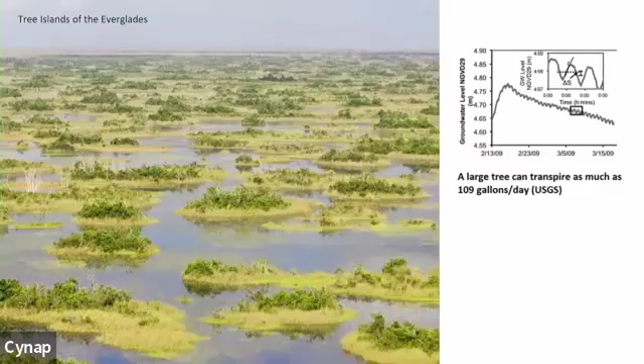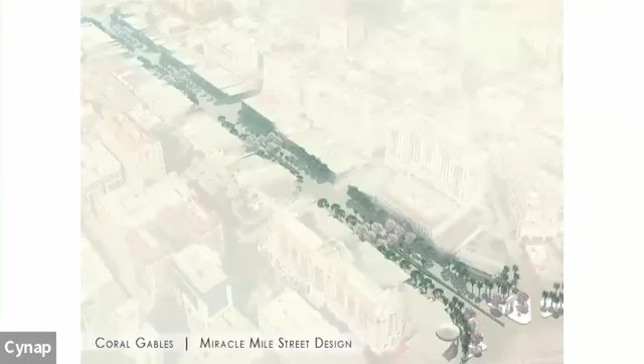The project I'm going to show next took Dr. Sinto's work, which studied a tree island in the Everglades. As a firm, we were commissioned by the city of Coral Gables to redesign Miracle Mile in 2016, right after this study came out. We also redesigned Giralda Plaza next to Miracle Mile. That project had $27 million for the mile and Giralda Plaza, a once-in-a-generation opportunity to solve pluvial flooding—rainwater flooding that would flood the shops during summer rains. It was a soggy district, with elevation around 7 or 8, which is high ground for Key Biscayne, but not that high.

Gracias, thank you. I think the double mic—audio's way better. I kept adjusting my hearing aid.

So the question was, how can a tree island in the Everglades inform the redesign of an entire district, an entire street? Step like a foot or two away so you won't be in that background. Okay, cool, thank you—and I don't have to show my back to the crowd.

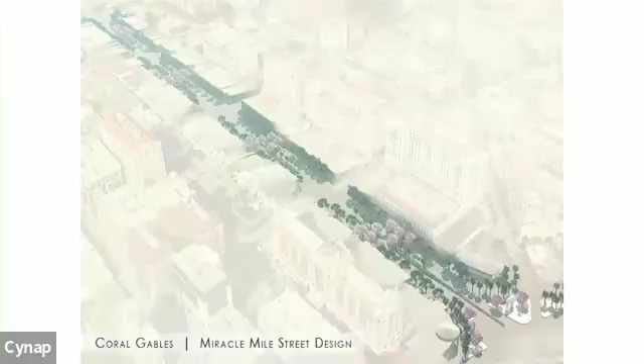Hurricane Irma tested this project one month after it opened. Irma flooded a lot of Southeast Florida and took weeks for towns to recover, but Miracle Mile stayed completely dry. The New York Times wrote about the project because of the number of business owners who were able to open the next day unscathed.

But the key is, how do you build a tree island that can evapotranspirate groundwater and desaturate soil? In low-lying places, you need to make room to store that water. In the middle of a place like Key Biscayne, you have a different groundwater scenario than at the edges. The edges have a salt wedge, while in the middle there's a phenomenon called the Ghyben-Herzberg phenomenon, a freshwater lens of rainwater floating on top of salt, since freshwater is more buoyant. So sometimes flooding might occur in the middle of Key Biscayne instead of just the edges—counterintuitive, but that's the bubble of fresh water.

In the case of Miracle Mile, we excavated fairly deep, almost to groundwater, and backfilled with structural soil. Structural soil is a fancy term developed by Cornell University to describe uniform gravel. Essentially, the base of a tree island and the base of Miracle Mile is a big stone reservoir, to put it simply. Structural soil is the same uniform gravel with a lot of void—40% void, which is the number you use for your stormwater calculation.

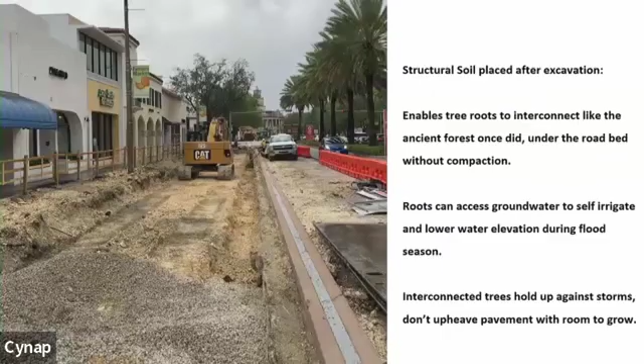It also has growing medium in it that encourages tree roots to grow underneath. So the structural soil protects tree roots from truck traffic, allowing it to handle the load, but it also lets tree roots connect to each other the way the forest did a thousand years ago, accessing groundwater to self-irrigate. If you plant a tree conventionally, it can't access groundwater, so you have to irrigate and add fertilizer. But city water is pH alkaline, which makes plants inefficient at uptaking fertilizer—it's a feedback loop. If plants can access groundwater, they're happier, more robust, more anchored in hurricanes, so you get less disaster response recovery budgets. They connect with each other, share nutrients, and connect to the groundwater—everyone's happy.

Now the challenge with Coral Gables is the big budget, $27 million. But if you're going to look at an entire city like Miami, we can't have that cost per square foot for domestic neighborhoods. So we have to look at other materials like porous paving—asphalt, concrete, or other systems—because we can't use the same stone with porous joints everywhere that we did in Miracle Mile.

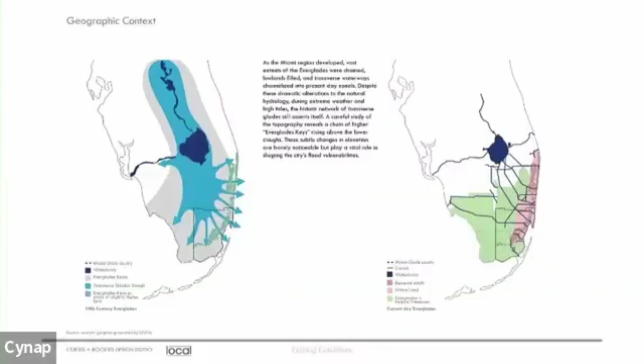So the city of Miami commissioned us after the Stormwater Master Plan study to look at green infrastructure systems at scale—not a single bioswale, but a whole network of systems that can take what we did in Miracle Mile, have the same performance, but scale it with a more affordable cost per square foot.

And in the case with this, a lot of the planning—this is the city of Miami—what we organize is not a watershed approach, but an ancient landscape approach. That is to understand that in the last round of sea level rise, we had ancient islands, and to organize this design around the islands and the watersheds between them.

So in the case with Southwest Miami, Southwest Streetscapes, you see this as the outline of the scope of the project, but it touches on 3 ancient atolls. So really Miami's future is much like the Lower Keys, right? There were these islands with sloughs and creeks between them.

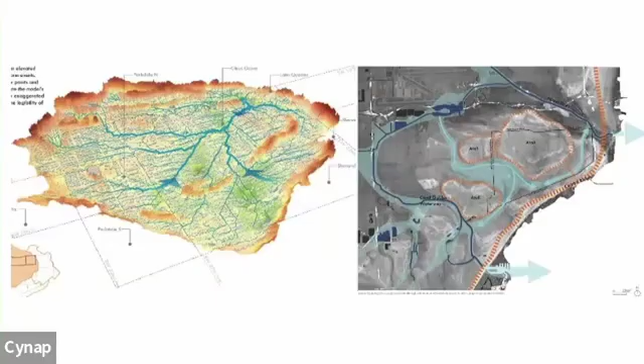And how do we make that more affordable is to look at more cost-efficient ways of doing things, but also understanding the way our budgets are organized for maintenance now kind of go against the current of what's been there for, and what is still underground today.

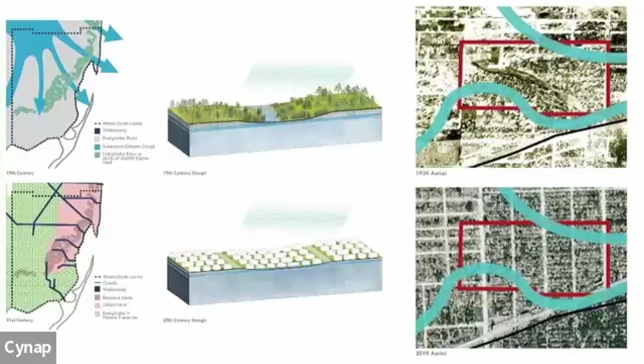In the case with Southeast Florida, the goal was to reconnect the Everglades to Miami, and the Everglades to Biscayne Bay, the way they used to, through some of these street designs and park designs. This is a photo from the 1920s on the upper right corner that shows one of these ancient sloughs that are now underground, under houses, and still flowing underground, but we put an urban fill of a few feet that's highly compacted, so we don't access that porous geology.

But what the project led to is we only need to adapt about 1/3 of the city of Miami in the next 2 mortgage cycles, 60 years out, to buy time for investment in these systems over the next generations. And that was about 1,500 acres.

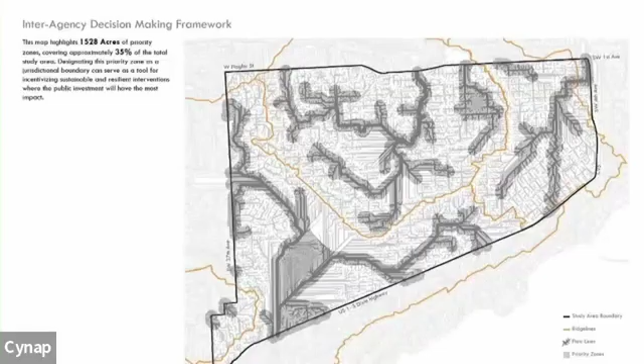And you see this in the gray areas. This is where you get the high concentration of water that came as a result of the Stormwater Master Plan study, as well as some of the hydrological flows uphill from that. And so if you work upstream and follow these ancient sloughs, we can leverage the old geology of the place to solve some of the problem.

And it led to this kit of parts that is now being implemented in the city of Miami, which is blue streets and green streets. Green streets are for infiltration uphill. Blue streets are for infiltration and conveyance, to be able to move water through the porous road base.

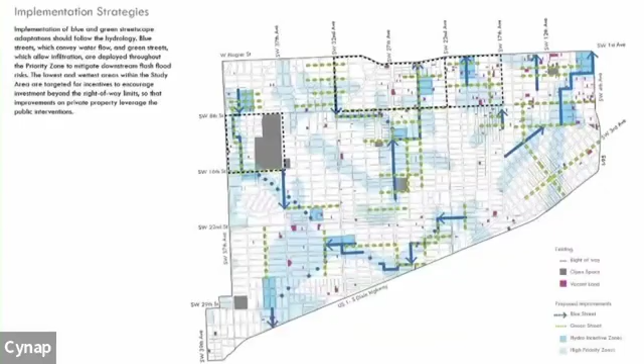And this is what they look like in 3D, as a kit of parts for the city of Miami to use in private property to encourage buildings to hold water—meaning fences that are thickened as cisterns, blue roofs—and then in the public realm, to have yard easements that become front yard sponges that support the right-of-way as a contiguous living system.

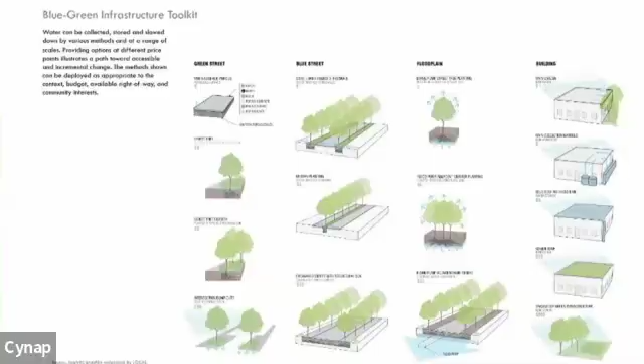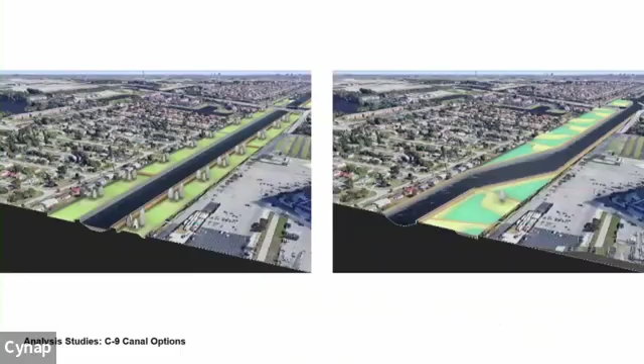We also are working with the South Florida Water Management District, redesigning canals. This piece of the project was BRIC funded from FEMA, which that program just got canceled, but we're continuing on with Wes Brooks from the Chief Resiliency Officer from the state. It's looking at, when you treat asymmetrical alignments on a canal, how do you get more water quality improvements within the maintenance regime of the canal.

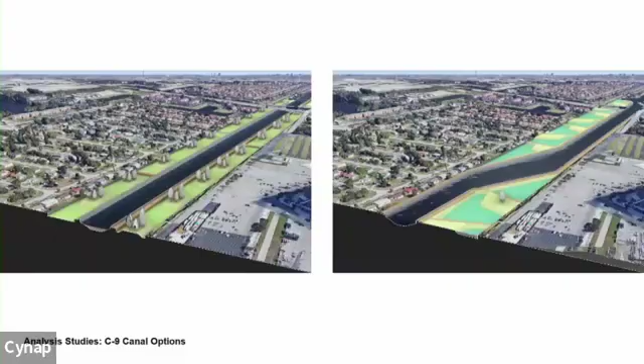So this is working with Catalina from the Canal District, from the Water Management District, and David Colangelo. And this is what that drawing is set up for. You see the neighborhood to the left, secondary canals that can hold a lot of that water, treat it, and then the maintenance zones of the canals become infiltration zones.

And when there's a heavy rain event, it discharges directly in the canal. So you get a sustainability mode for water quality, cleaning water, and you get a resiliency mode for extreme rain events that are all about conveyance.

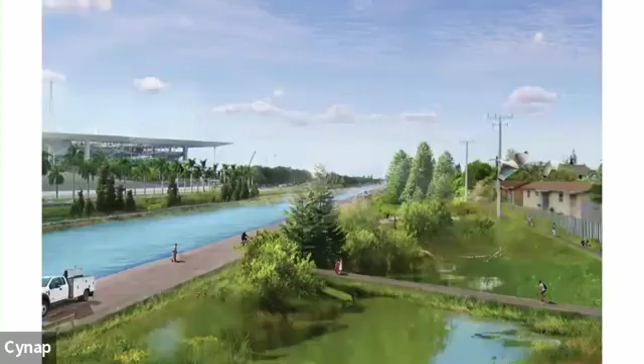And this is what those boardwalks look like through the new South Florida Water Management District open spaces that are now also sponges. We're also working with the county, with resiliency, open space and public works, Mayor Cava's office, along with the district. And the prime on this grant is with Miami Waterkeeper, funded by the EPA.

This is looking at that island approach. This is one of the ancient islands. This is downtown Miami. And interestingly, those sloughs still exist, even though there's streets and there's Overtown and Liberty City. Interestingly, they all converge and follow North Miami Avenue and then discharge into the Little River Canal.

And at the base of that discharge point, that pour point, there's this existing Larchmont Park that's been overlooked by the county for a long time. It hasn't been studied since the 1970s. Turns out to be the most important park in this watershed because it's at the bottom, just before it pours into the canal.

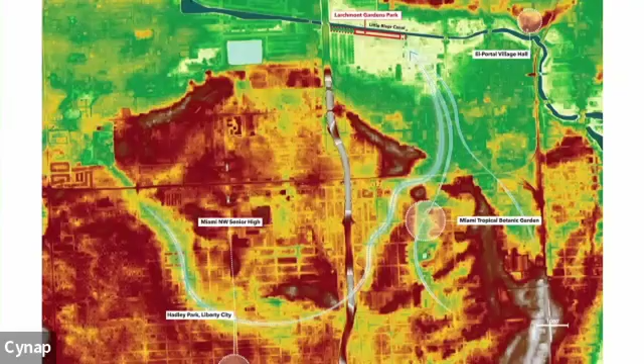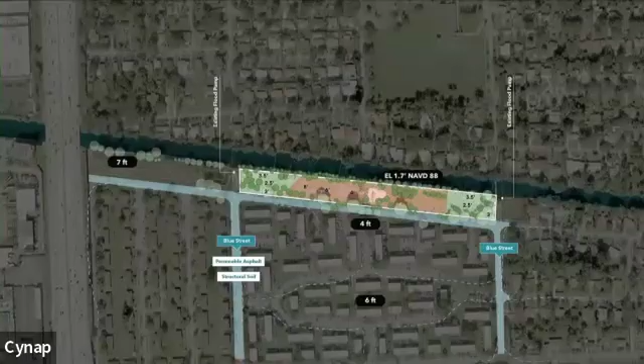We're working with Patrick on this project, who ran the stormwater numbers, working with the groundwater through the geology and also with the discharge. Without engineers like Patrick, we can't do this kind of work.

Most importantly, the recreation park becomes an island surrounded by this green infrastructure. About a third to half of the park was converted into a big sponge. The remainder is set aside as solar sheds that can power the park and create backup power for the existing flood pumps on site, as well as providing shade for the ball courts so people don't get sunburned and overheated.

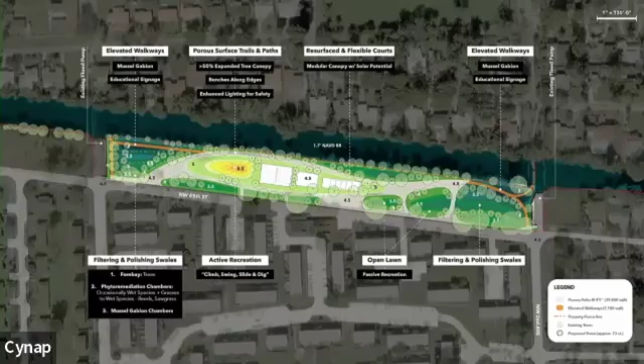The flood pumps are flanked on both sides of the project. They're on district land, but built by the county. This is what it looks like in 3D. We can hold one million gallons of rainwater in this park.

Plus we have a blue street network uphill from it—you see those blue strips going upstream—and another million gallons in the blue streets. So that's two million gallons of load every time it rains, taken off the flood pumps, which reduces about an hour of runtime from those adjacent flood pumps. They're smaller, 10,000 GPM flood pumps.

But it starts to add up, because if every time it rains those pumps don't have to run for an hour, that gives you more life on those flood pumps. Now you're starting to see the relationship between the living infrastructure and the gray infrastructure—they work together to solve the problem.

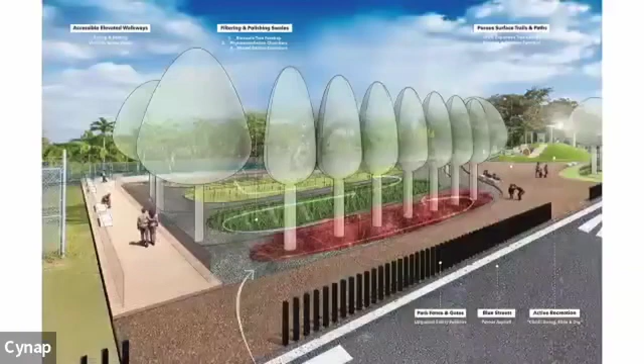This is a detail of one of the networked swales going in, with the recreation zone to the right—an active recreation zone. These are not pie-in-the-sky designs; we've built these not only in Miracle Mile, but also in low-lying areas.

Here's a sponge park that is two kilometers long in Puerto Rico, on the west coast in Mayagüez. In this project, we had civil infrastructure, stormwater pipes discharging into the bay. You'd expect the Caribbean to be turquoise, clear water, but because of the discharge it was polluted. We had a $55 million budget, working with the governor of Puerto Rico and the mayor of Mayagüez. In the upper left corner, you see those stormwater pipes flowing straight into the bay, and the bottom left corner is the proposed strategy, which was built in 2007.

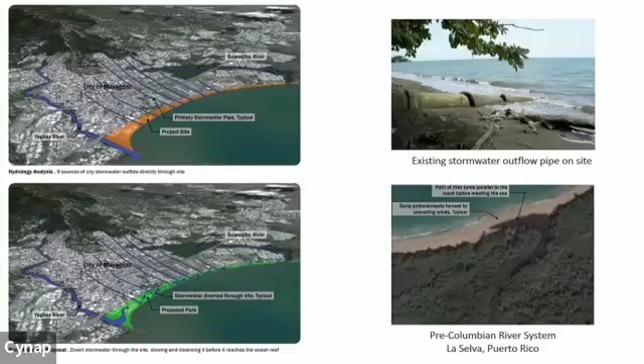We learned by looking at the ancient pre-Columbian river systems in the Caribbean and how, near the city, the rivers went parallel to the beach—they didn't go directly in the way the pipes are. That allowed green infrastructure that exists in nature to pull nutrients out and cool down the river before it hits the reef. Most importantly, there's a sand dune system between the river and the ocean that filtered a lot of the pollutants.

I'm going to stop for a second here and jump to what other cities are doing for a few minutes. I'll show you a lot of this knowledge—while it goes back to indigenous knowledge, the Romans also built incredible streets.

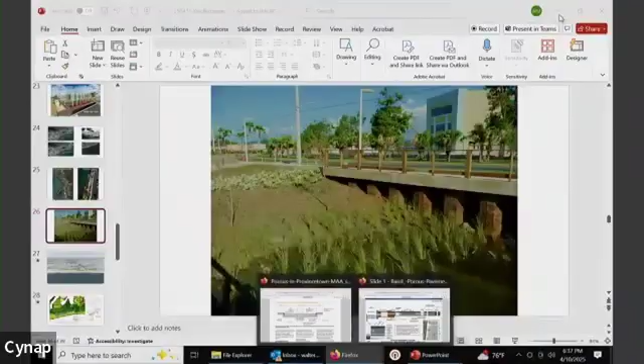And the Roman roads—let me pull up that Roman road for a second—the Roman roads that were built a couple thousand years ago are still, well, they're not used today, but they're still functioning.

I'll go back to the Roman road in a second. But this is Provincetown, Massachusetts.

What they created like 15 years ago was a zero impervious ordinance for the city. They said no more impervious streets, only porous. And interestingly, Provincetown started to create this porous asphalt that does a few things.

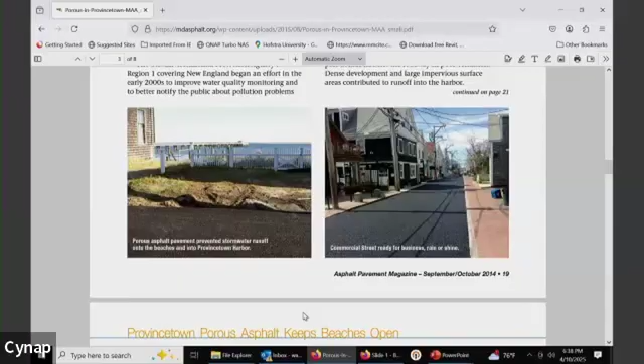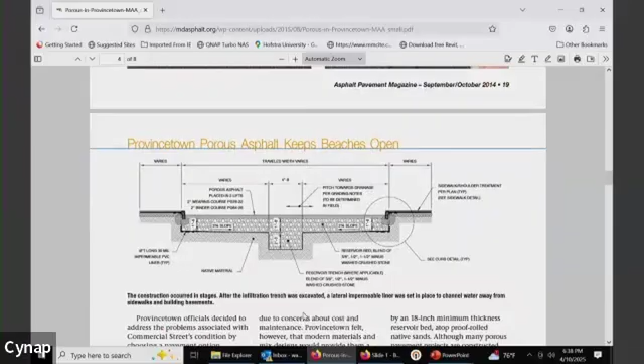They have a lot of old, historic, low-lying buildings. In the cross section, they had a unique design with a slight slope on the subdrain down to the center, so they were essentially dewatering a lot of the ancient buildings with that porous system in the streetscape. If you look at that slot at the bottom, it was connected to the groundwater, so they had some groundwater management going on in that cross section design. That's the case of Provincetown.

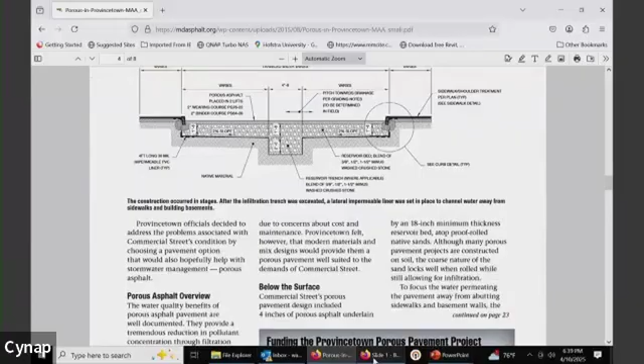The other case is Lake George, New York. They have a highway—there's a specification for porous highways in New York State with the DOT. This highway was built on State Road 6. It's a 4-lane highway, a case of heavy duty porous paving specification. Yes, it costs more—you now have 9 inches of porous paving in the cross section of the asphalt.

But this was built 15 years ago, and I asked the public works director from Warren County who commissioned this, 'How is this highway doing compared to other conventional highways?' He said, and I have this in writing, I can share this testimony—he said this porous highway has outlasted the conventional highway that was built at the same time. The conventional highway is already failing, but this heavy duty specification with a thick base of porous asphalt has handled all the truck traffic and everything you'd expect on an American highway.

And yet, if you look at the thickness of the base, that stone reservoir, you're getting all that storage as well. So every single street, every single plaza, every single parking lot is open.

What's really exciting about Southeast Florida is you lead the country right now on porous paving. The mayor of Miami-Dade County has passed an ordinance to require porous paving in certain scenarios. That's very exciting—it's making my job easier in other jurisdictions where I'm like, guys, just make it the law. They're doing it in Miami-Dade County. So you guys are very advanced here.

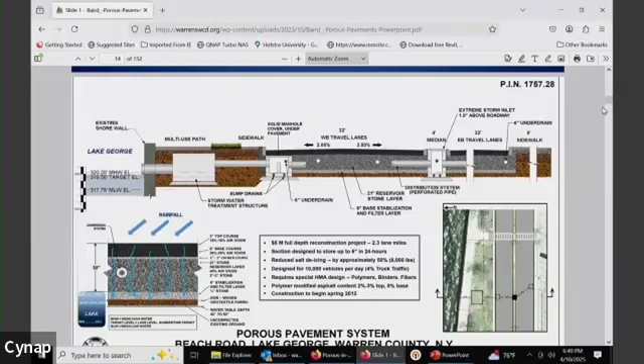It's an exciting time to have these conversations about, once you do a stormwater study or a gray infrastructure study, what else can you do and work uphill. You can do it incrementally, in pieces, with pilot projects. So I'm going to pass it to Patrick for a second to chat about his experiences.

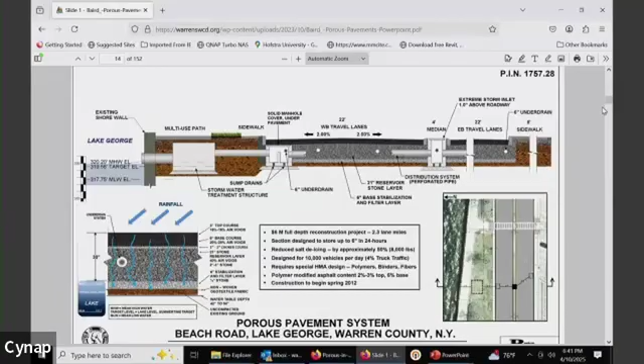Thank you, Walter. I think you covered everything I wanted to say. No, but this is a great graphic, and I think Walter's stories and testimonies show it can be done in a lot of places. Can it be done everywhere? Not exactly. But with engineering, it can definitely be done here.

I drove around the neighborhood on my way in, just looking at the residences and the situation you have at hand, because I was a resident in Miami Beach when they did their road raising program, and there was a lot of pushback. What happens is when you raise a road, it displaces that runoff to yards, and that's with day-to-day runoff and everything—not just pump stations.

So really, with a porous design, you reduce the risk of that harmonization issue, I would say, and you're keeping the daily storms out of people's yards, and keeping them off the road. The ponding is going to go down. That's what a lot of people also don't understand about roadway design.

Roadways are actually sized to convey a storm of a certain size—either the 10-year, 25-year, or 100-year storm is going to be flowing down the road, and it's either going to affect your cars or you don't want it to affect your house. So they design the roads so 100-year storms don't come into your house. And just like that, with porous pavement, we can do the exact same thing.

I'm engineer of record currently for two City of Miami sea level rise adaptation projects at parks: Jose Marti Park and Margaret Pace Park. Jose Marti Park is 100% design permitted. We got our DERM permit on the first submittal for using porous pavement, and we raised the river walk from about 1.8 elevation to 4.5 and 4. That's really what we suggest: raising it a bit higher and making it porous, making the roadway capture all that runoff so it doesn't go into the private residential yards. That's our design concept to explore with the team that's already fully designed the roadways—how could we do that type of situation here?